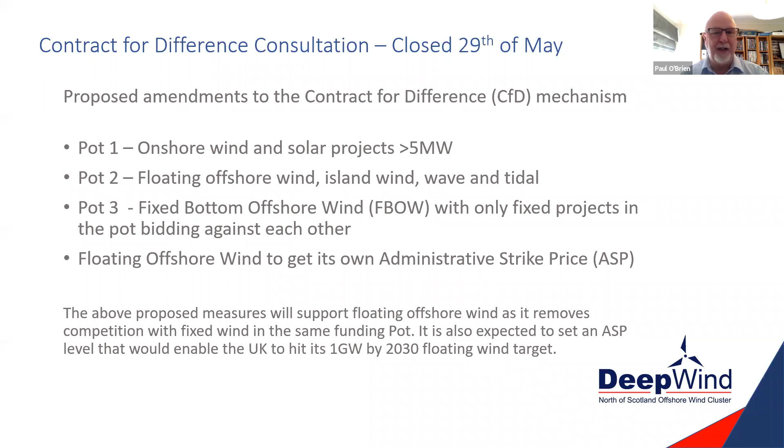We're hoping it will be enough to engender the first one gigawatt of floating wind in the UK by 2030. That's not the industry's target, that's the government's target. The industry is calling for double that, a two gigawatt target to be added. Because we're changing the contract for difference mechanism, floating offshore wind doesn't have to compete with fixed wind in this round. It's a bidding competition, so floating offshore wind will now just compete with each other. That's a great step forward for floating offshore wind in the UK.

What's coming next are our pre-commercial projects. We already have two announced: Pentland Offshore Wind, a 100 megawatt project in the far north of Scotland, likely to have 7 to 8 substructures with perhaps 14 megawatt turbines, kicking off in 2025.

And the Salamander Offshore Wind project from two of our Deep Wind Cluster members, Simply Blue and Subsea 7. I should note Copenhagen Infrastructure Partners, who are delivering Pentland, are also Deep Wind Cluster members. Deep Wind is the largest offshore wind cluster in Europe, and the lead floating wind cluster in the UK, possibly Europe as well. We have 214 members in our floating offshore wind subgroup.

Salamander is 200 megawatts and expected to kick off in 2026. We see these as stepping stone projects to achieve cost reduction by increasing the number of substructures. We're learning by doing, which will give us tremendous steps towards cost reduction by serializing the production of the substructures.

Now, the research happening at the moment: we have a number of programs running. You'll hear more from Ralph later, who's involved in the Floating Offshore Wind Centre of Excellence. One of their recent reports was a cost reduction pathway to subsidy-free, looking at the deployment needed to achieve cost parity with fixed wind.

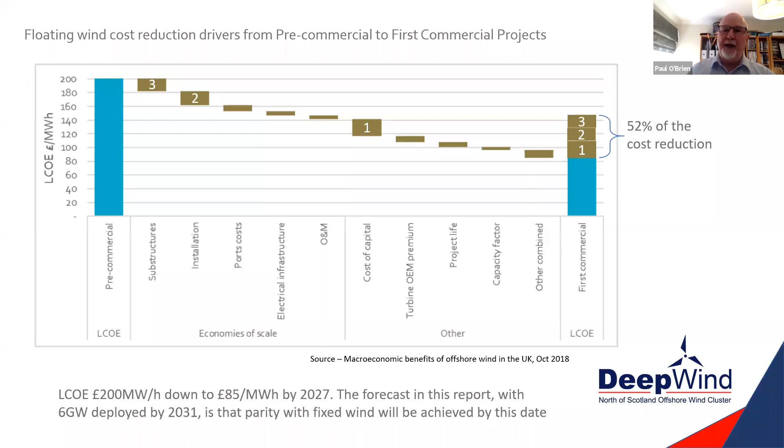There's also the question of whether the industry will disconnect and take them back to shore for those repairs, or come up with an innovative solution that overcomes the challenges. Using a jack-up in the water depths we're talking about is probably not an option, so we need to come up with a solution. The first 2 look at what those solutions could be if we stick with offshore, or if we're intending to disconnect the substructures and bring them back to shore.

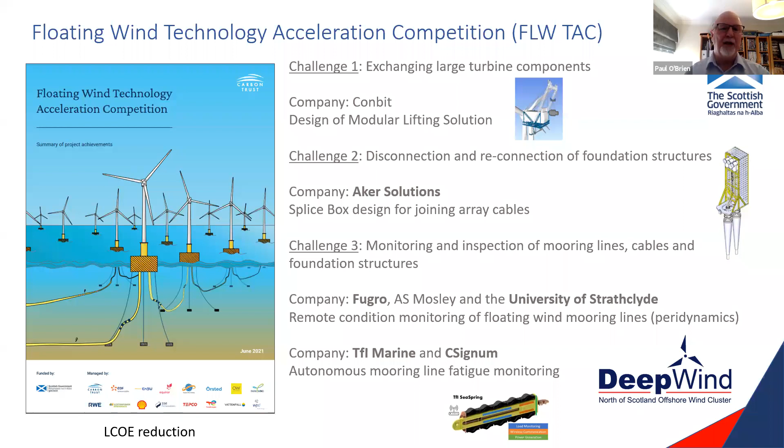So these are the kind of areas that we need to decide on when it comes to the operation and maintenance required for large activities such as removing blades, taking out the gearbox, etc. The industry has not decided which way to go, so we're looking at solutions that will deliver both.

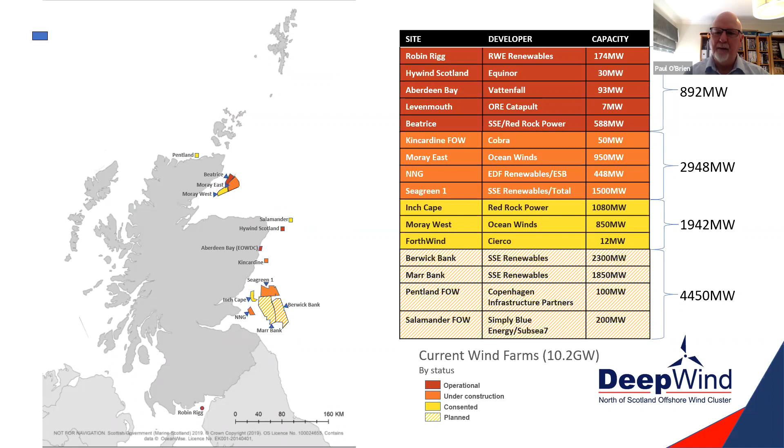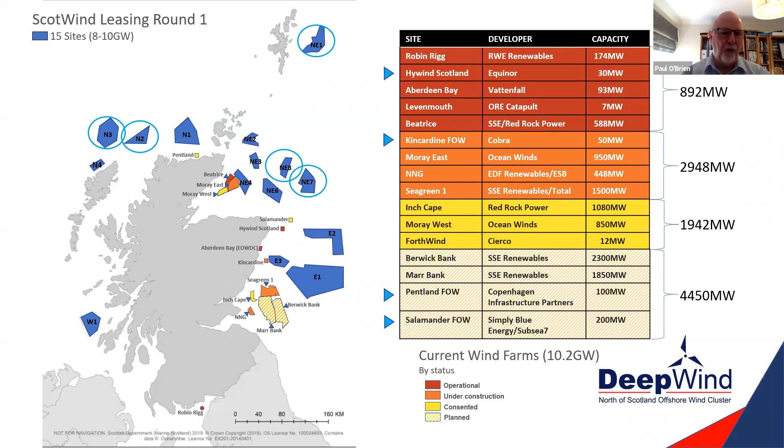Those circled are in deep water, so these are 100-meter plus sites, so they will definitely be floating. Some of the others are mixed sites, it could be fixed or floating, but we're expecting that of the 10 gigawatts that's expected to come out of this project, about half of it could be floating wind. So we could see up to 5 gigawatts of floating wind in this leasing round. Next slide, please.

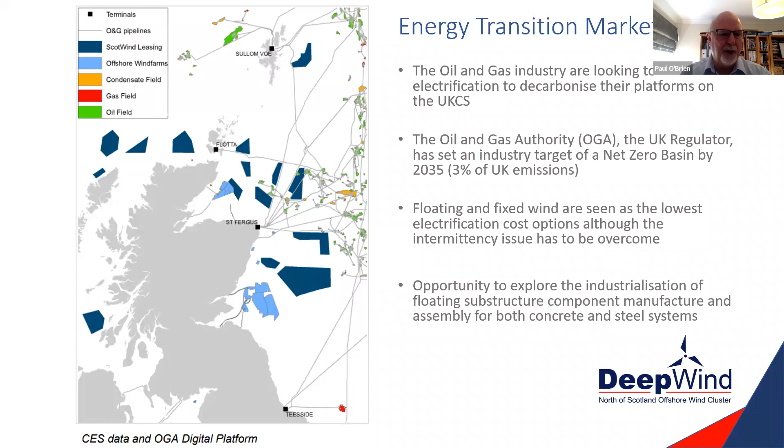Most importantly, we need to look at the industrialization of manufacturing the substructures and the assembly of them. So we need highly automated substructure final assembly facilities at portside for both steel and concrete systems. Many people are looking at concrete as a cost reduction opportunity, but the real key will be the design of the substructures. We need to design the substructures for manufacture, whether that's steel tubular components from tower manufacturers or slip forming of the concrete modular components. We believe this is the way forward for cost reduction on the substructures.

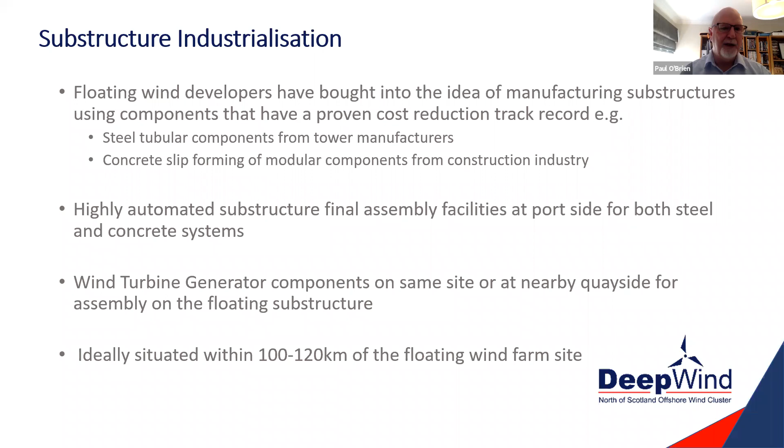We need to be very near to the sites, the floating wind sites. That has been proved, particularly at Kincardine. We cannot be trying to move these very large substructures, which are 80 to 100 meters in diameter. They cannot be coming from any further away than about somewhere in the 100 to 120 kilometer range from the actual floating wind site. Next slide, please.

And finally, we are looking at the learning. We need the learning to get the cost reduction. The report I referred to earlier looked at a 13% cost reduction through the learning itself. So we need these stepping stone projects. We need to see that there is an opportunity for mass production of the substructures to get the investment that the industry requires.

And so the pre-commercial and the energy transition projects in Scotland will be very important to achieving how we're going to actually deliver these substructures in a very cost down manufacturing opportunity way. And I think that's the last slide. Just check, move on to the next one.

Yes, so hopefully that's of interest. I ran through that pretty quick because we don't have a lot of time, but hopefully you can see that we know where we need to achieve the cost reduction, and we are moving in the direction that we believe will give us that cost reduction, which will see floating wind become a major competitor to fixed, or rather not a competitor, because a lot of countries only have deep water, so fixed is not an option. They just need floating offshore wind to become cost competitive with other forms of energy.

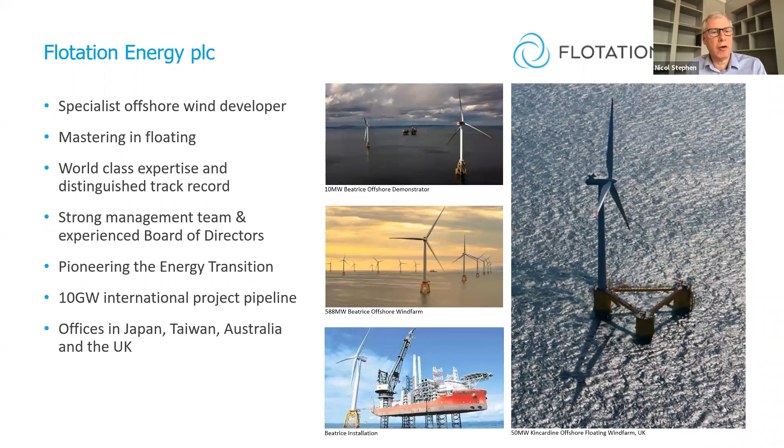We also conceived, designed and developed the Kincardine project, and we've been working with our partners, Cobra, the Spanish company, in relation to not only Kincardine, but also a number of other projects in the United Kingdom and Ireland. We've got an international pipeline now of around 10 gigawatts of projects, and we have offices in the UK as well as in Japan, Taiwan and Australia.

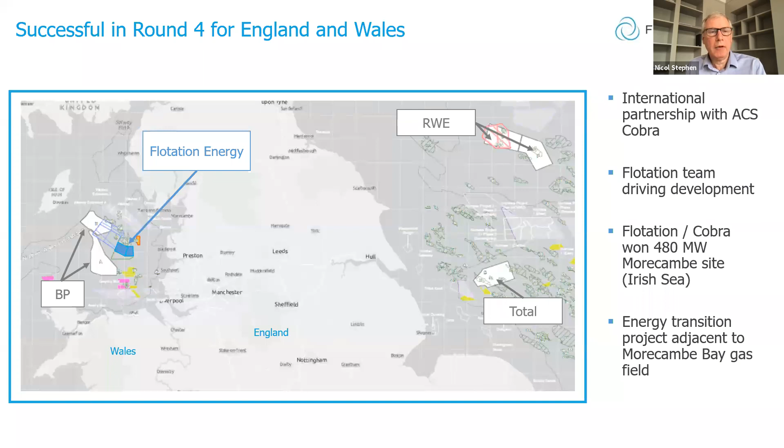The wind farm, depending on its size and scale, could serve either one major platform or a number of platforms, perhaps in the central North Sea or the northern North Sea. A large area of the North Sea could be served from one platform. We've got a project we're working on with a major oil and gas company right now that we're hoping to get operational in the mid-2020s, and it would be a 300 megawatt project.

We're also working both internationally and in England and Wales on other projects where we're going to be partnering with oil and gas majors. The advantage is that it decarbonizes the offshore operations. All of the offshore electricity is generated from gas or diesel on our offshore platforms in the United Kingdom, and it's become a priority of the government to decarbonize those operations using renewable electricity.

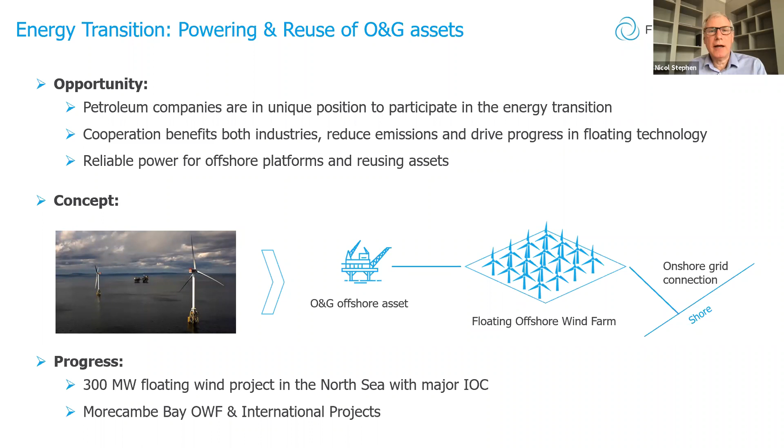All of this gives us a great platform, a great launch pad to do things in other parts of the world. And having developed Kincardine, having seen it become a success and become the largest project in the world, we decided to move on from there.

And we are actively seeking partnerships with local developers, with local companies that are interested in the development of both fixed and floating, but clearly our expertise is in floating. We've got projects as well - I don't know if anybody today is listening or looking in from Australia, but we've now also got projects and offices in Melbourne and Perth, including energy transition projects where we're working with one very significant oil major.

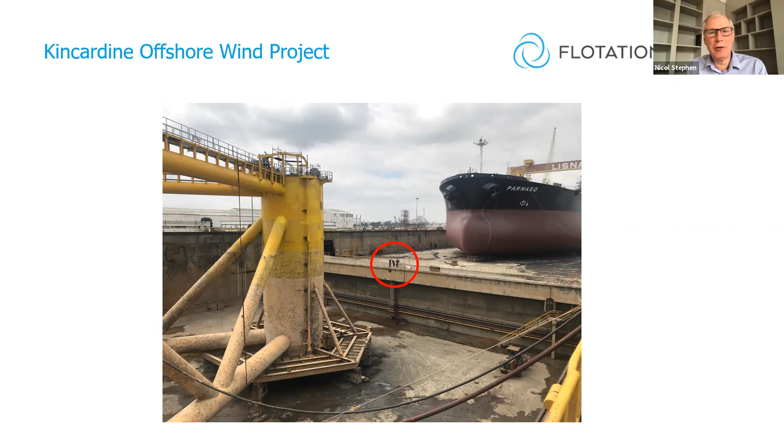And as Paul was saying in the previous presentation, we need to look at modularization, industrialization of the process, and being able to do it close to site. These are major lessons for the future, and we are determined to be an important part of that. To achieve that, we will need to look at improving some of the facilities in Scotland, but I know that both companies and government are committed to that, because this industry is so important to the future of our country, and I believe very important to the decarbonisation, to the net zero targets for the rest of the world.

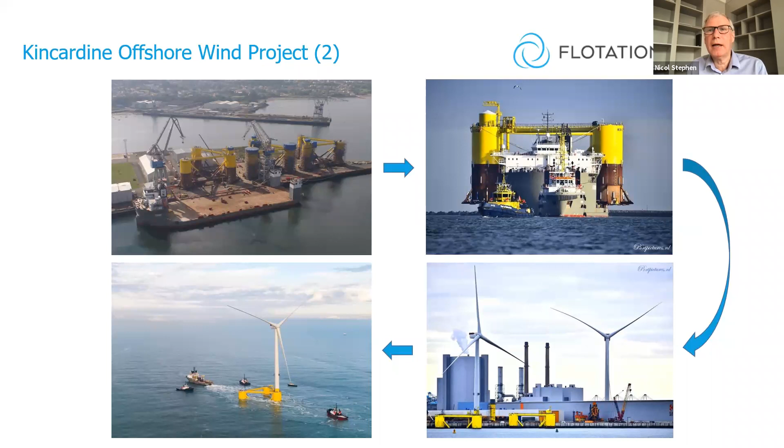So in summary, just a bit more about Flotation Energy. We believe we have a unique team, real expertise, and a very strong track record. We've got this pipeline of projects internationally. We've been awarded the Crown Estate lease with our partners Cobra in England and Wales. We're pioneering the energy transition, developing projects in Taiwan, Japan, Europe and Australia. We strongly believe that development has the potential to be a domestic business.

There are some very major multinational players in this business, and they're highly respected. But I would like to see more local companies getting involved in development, and Asia is expected to be the major growth market for offshore wind through to 2050, with over 600 gigawatts of new projects to be developed. That's why we very much welcome opportunities for collaboration and partnerships.

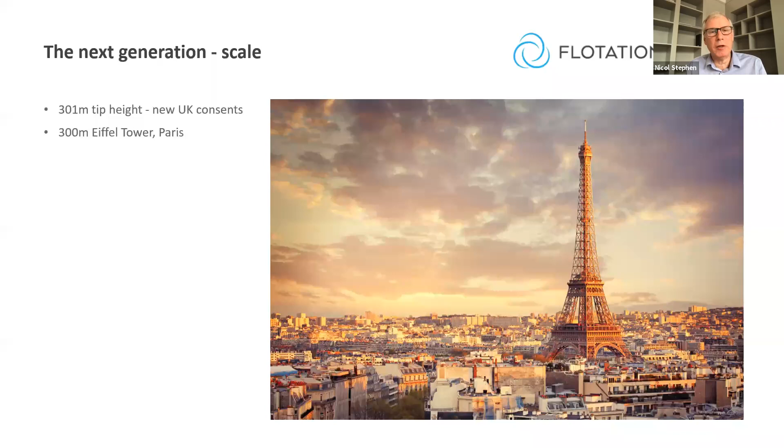Just a sense of scale - the next generation, where is all this leading? I mentioned the tip height of the existing turbines at Kincardine, 194 meters. The Eiffel Tower in Paris is 300 meters, and it's expected that in the next 10 years, that's where these wind turbines could go, a similar sort of height. So if we skip on to the next slide, you can see it there.

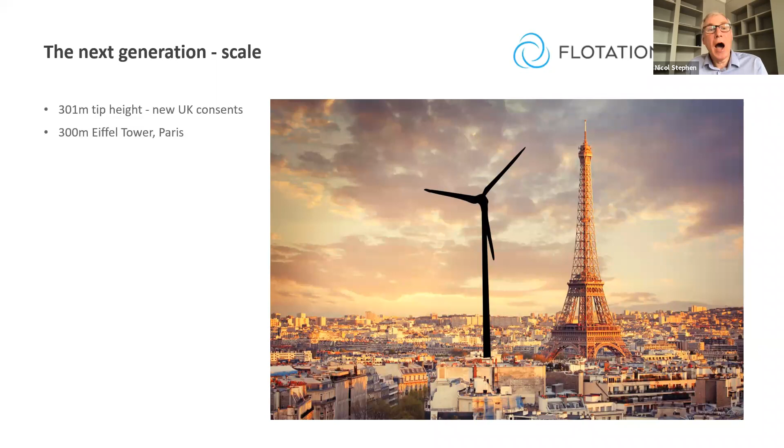Sorry, one back. You can see there the sort of scale of turbine that you would expect to see within 5 or 10 years as we move up to a 20 megawatt turbine. And we can float these - that's the message. We already have the skills, the technology, the knowledge, the know-how to be able to do that. So how do we achieve that? That's what I'll turn to at the end of my presentation.

Well, first thing is clear: we need to get ready for bigger and bigger turbines and projects. I've visited some countries just before the lockdown where they're still very much about early stage testing, experimental projects, maybe 1 or at most 2 or 3 turbines. We're beyond that stage now. We can go to the full-scale commercial stage.

Second point, as Paul was mentioning earlier, different foundation types are probable. That means they could be semi-sub, which will probably be the most significant, but they could be spar or tension leg, steel or concrete. It's unlikely we'll standardize on one single solution as we have with the turbines, which are one steel structure, three blades, pretty much industry standard. With foundations, there's definitely room for different designs, and there are at least 8 or 10 credible designs out there at the moment, which is good for competition and also good for cost reduction.

My third message is find the very best wind and scale up. With high wind and with Kincardine, we're seeing capacity factors for floating wind pushing up over 50, over 55%. Costs are starting to fall very significantly. There's a real opportunity to push forward and get these floating sites in the strongest wind speed areas, where there's less visual and environmental impact. Floating sites are better for seabirds and better for sea mammals, the dolphins and the whales.

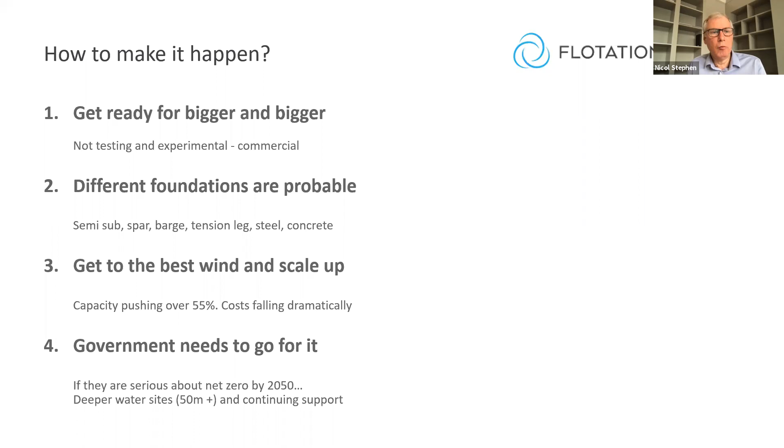My final point is that governments need to go for it right around the world. If they're serious about net zero by 2050, they need to support floating in this transition period to get to the full-scale projects that will make it one of the cheapest and most cost-effective ways to deliver renewable electricity worldwide. And then just a few quotes on my final slide.

Is there a floating wind future? There are some cynics. I'm here in Aberdeen, Scotland, the heart of the oil and gas business, not only in Scotland but arguably for Europe. Many of my friends were quite cynical when I went into this industry more than 10 years ago. Some of them even smiled or perhaps even laughed. They thought there was a very, very long future for oil and gas and a very small future for renewable energy. Well, all I can say is they're not laughing anymore. They can see the future happening.

Remember that Tom Watson, when he was chief executive of IBM, said he thought there was a world market for maybe 5 big supercomputers. Remember that in 1993, Bill Gates said of the internet, we're not interested in it. And remember what Gary Hamel said in his book, Competing for the Future: it's not about predicting the future, it's not about monitoring the future, it's about getting out there, making the future happen, shaping the future, making the future a reality. That's what I believe together we can achieve, a very exciting future for offshore wind, both fixed and particularly for floating.

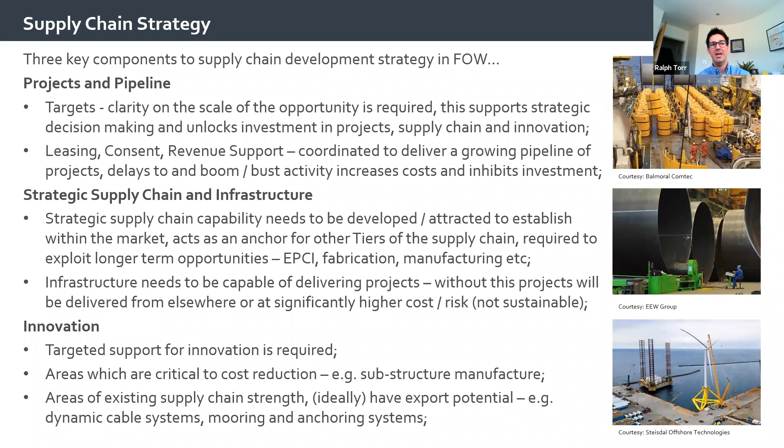The main focus for markets, particularly here in the UK, is clearly substructure manufacturing and project delivery, but also in the UK and Scotland particularly, we're looking at where the existing supply chain strength sits, and we'll hear from leading organisations shortly about that. Our particular focus at this stage is on dynamic cabling systems, mooring and anchoring systems, which are critical components, and areas where UK and Scottish organisations already have world-leading knowledge. So those are the three main elements to a broader supply chain strategy that any market would take, and I'll touch on a couple of specific activities we're doing in the UK Centre of Excellence to support the growth of the industry.

So there are three main themes to our strategic approach to developing the supply chain in the UK. The first is working with our partners to make sure that the UK establishes itself and grows to become the leading floating offshore wind market in the world.

We're already in a great situation, but there are a lot of other markets moving very quickly, so we want to make sure the UK retains that leading position. There's quite a lot of work ongoing to make sure we're very clear about the role floating offshore wind will play in net zero in terms of scale of deployment. That's a key part of our activity.

The second area of activity for us is creating opportunities for the UK supply chain, making sure that the projects that develop over the next 5 or 10 years develop in a way that means the UK supply chain has a really good opportunity to supply products and services into them.

The final part of our activity is looking at how we can attract world-leading innovation and deliver it from within the UK, working with our partners to help play a key role in addressing critical issues around, for example, dynamic cabling systems and mooring and anchoring systems. So yeah, thanks for your time today.

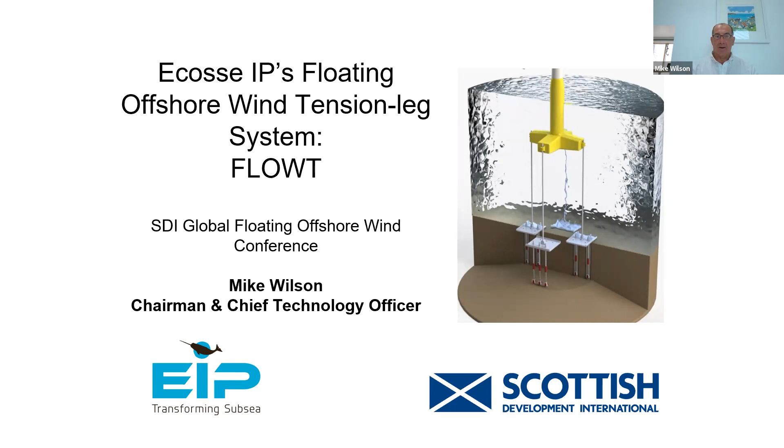This is a semi-technical presentation which shows in this first slide how a tension leg platform is developed for supporting floating wind substructure and how it's attached to the seabed. It's very often forgotten about because it's out of sight and out of mind, but one of the key drivers for floating wind is how do you make the floating wind substructure stay in the right position, and how is it anchored to the seabed.

It can be a very expensive process. For a 10 megawatt turbine to have a tension leg platform, as we've shown here, you need an on-bottom equivalent weight of about 5,000 tons. So installing 5,000 tons subsea is a very difficult and expensive task, so we need to find a different way to achieve this. Our FLOWT system is one such system that enables this to happen.

By having a tension leg system, you have suitability for all water depths and a huge range of seabed types. We can use this to moor floating wind alongside existing oil and gas platforms or as part of an offshore wind farm.

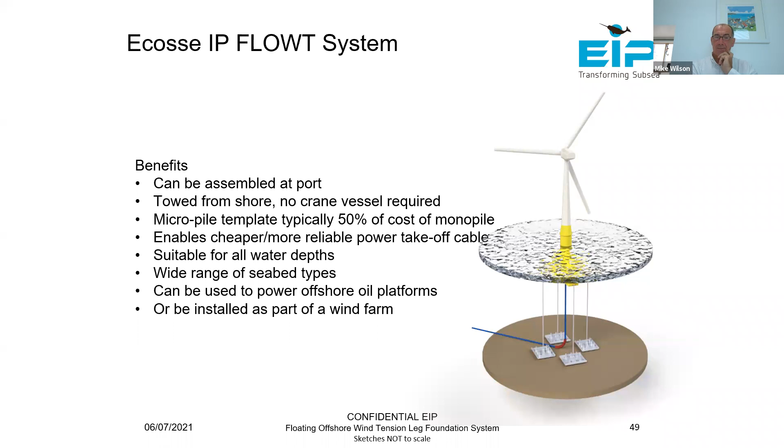The components of our system are an ambient lifter, which is our own proprietary technology, a micropiled template, which is owned by others, the floating transition piece, and the tension leg foundation.

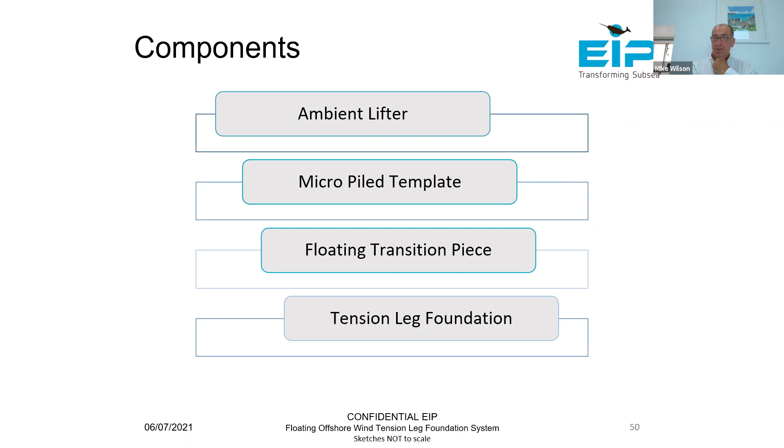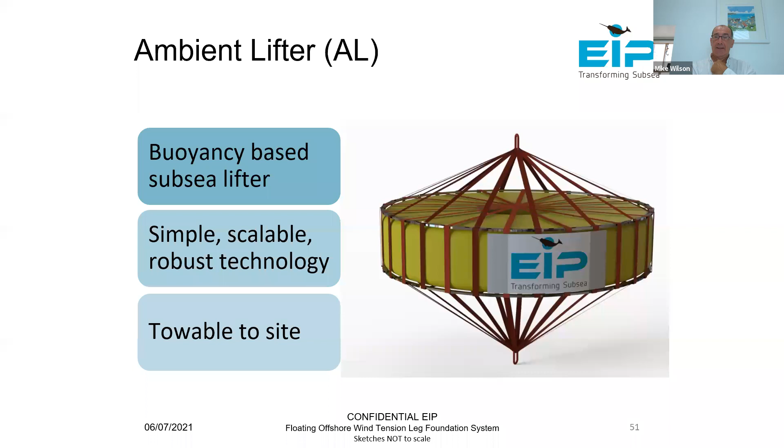What is ambient lifter? It's a buoyancy-based subsea lifting system that can lift anything, not just floating wind structures. It's a simple, scalable, robust technology that makes large structures towable and installable on site using our system.

Some of the benefits of ambient lifter versus conventional technology are simple components and simple technology, enabling low-cost local deployment, local being a key part of this. It's a robust solution that can install large structures at any depth, and we can use this to install any size and type of foundation. This enables much wider weather windows than if you use surface-borne technology to install.

By comparison, heavy lift vessels are expensive, location dependent, and there's scarce availability. They're very weather dependent, and their mobilisation and demobilisation costs are very high.

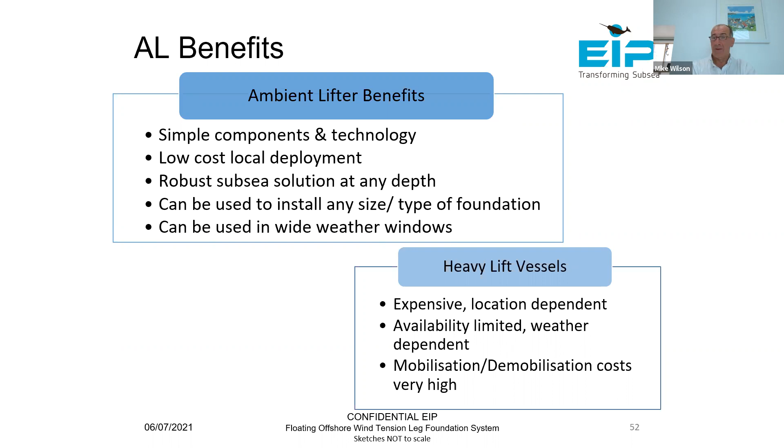So what are micropiles? Micropiles were developed in the 1950s and 1960s to stabilize onshore structures and are currently used for onshore wind turbines. They mimic a tree structure, where the root nature of the tree enables it to withstand wind force during normal weather conditions. It involves using a drill rig to grout in pins which form a lattice work like a tree root structure, and we are helping others pioneer this for the subsea market.

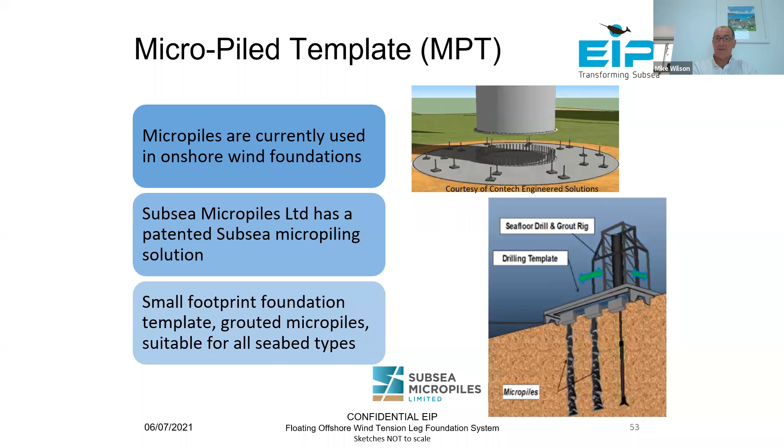The benefits are that it's suitable for rock seabed and other seabed types - rock, sand, clays. It's significantly cheaper than other foundation types, and again can be installed without surface-borne vessels being directly tethered.

So, the floating transition piece - we all know the benefits of being able to float these to site. In combination with tension legs, it minimizes movement and enables a low-cost power export cable to be used. Power export cables are a critical single-point failure for floating transition pieces or floating wind turbines. Basically this can provide a firm base for any standard type wind turbine.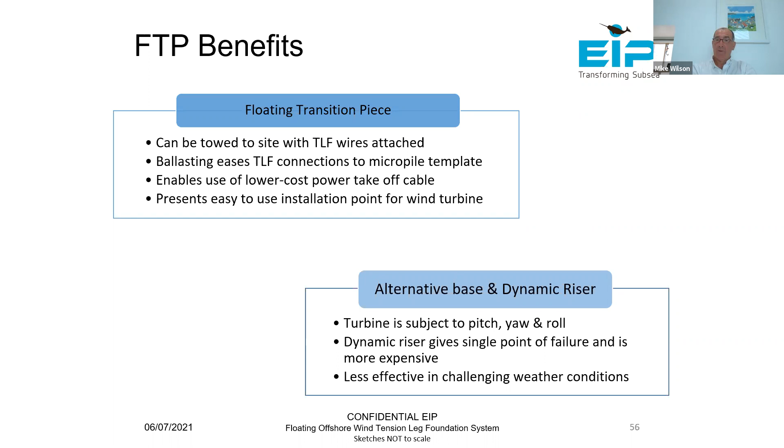The tension leg foundation is tried and tested for many decades in the oil and gas sector. It uses vertical anchor wires or pennants, and has a very small footprint. This small footprint is actually critical for other seabed users. Instead of having a massive array over a couple of kilometers of anchor wires, which prohibits fishing and other activities, the vertical array means you take due consideration for other stakeholders in the area.

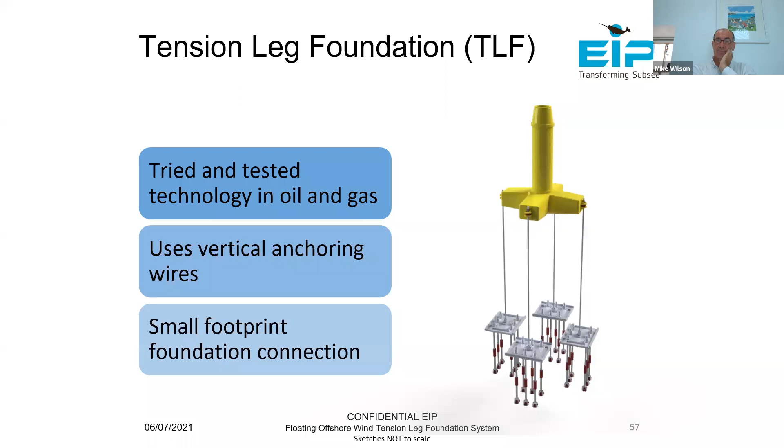The main benefits of the tension leg are that it remains vertical with smaller movements in bad weather, and it enables a lower cost export riser. Existing systems mean a large footprint, dynamic riser, and much more pitch, yaw and roll that needs to be taken care of by the turbine manufacturers.

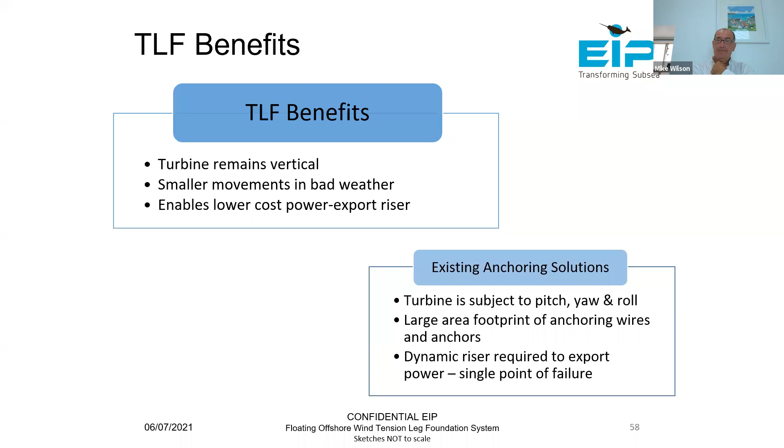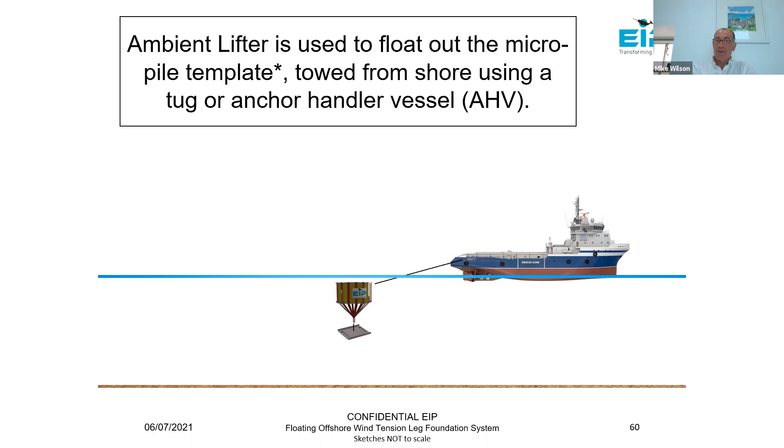A little storyboard here. The micropile template can be towed to site with a small vessel and positioned accurately on the seabed using the ambient lifter system.

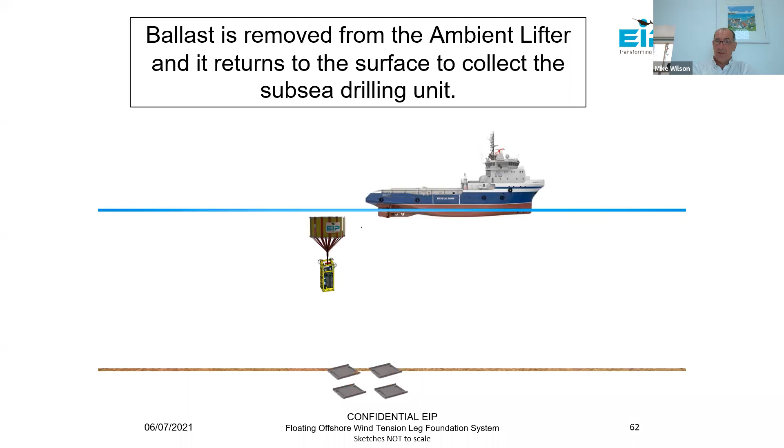Now we have the templates on the seabed. We use a subsea drilling unit to install the micropiles through the templates into the seabed.

You can see here the ambient lifter being used to control the drill unit, which is then subsequently put on the seabed. During all this activity, there are only soft tethers to the surface, so there is no significant weather penalty.

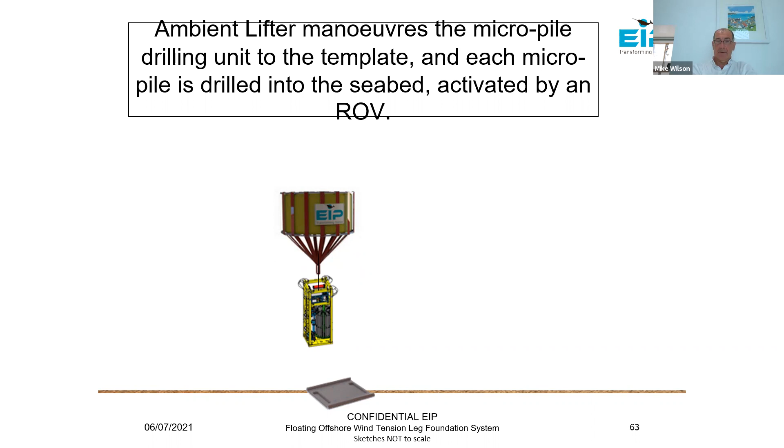Then we inject the grout into the micropile system and make the piles into the very strong structures that they are.

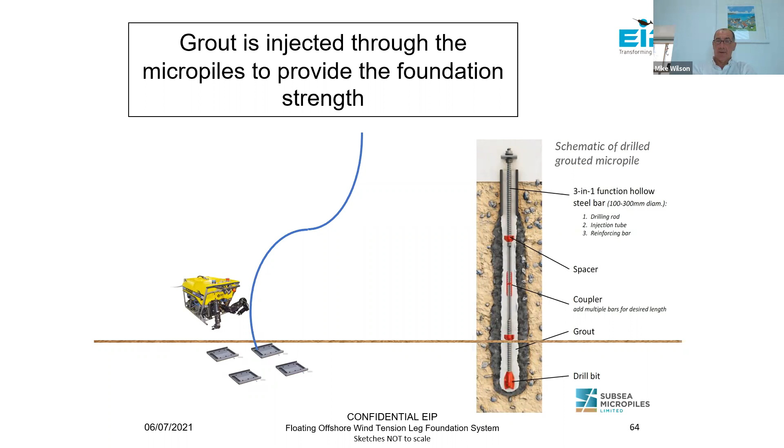Then the floating transition piece is towed to site, as conventionally demonstrated with other technologies.

Then the floating transition piece is ballasted down and the tendons or wires are maneuvered into place, again using ambient technology to help lift and maneuver these.

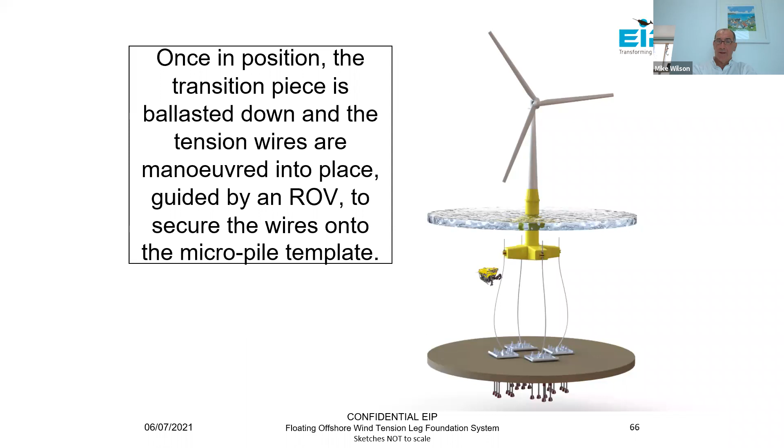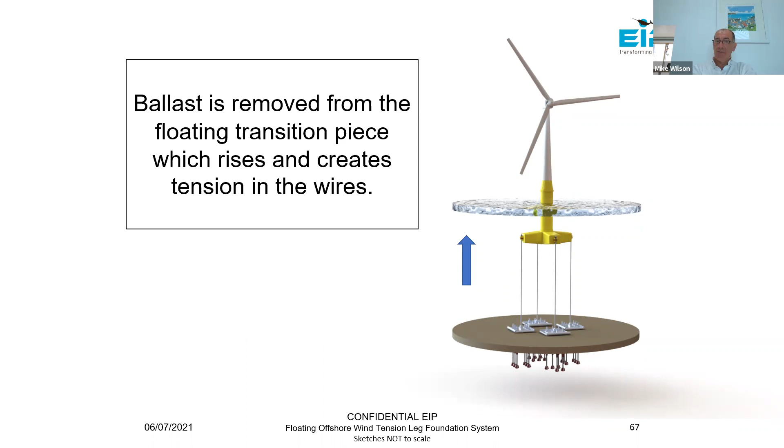Then the ballast is removed and the floating transition piece rises, creating the required tension in the wires.

Then the power takeoff cable is installed. We have a proprietary technology for making sure that the movement remaining in the tension leg system is taken care of inside the nacelle.

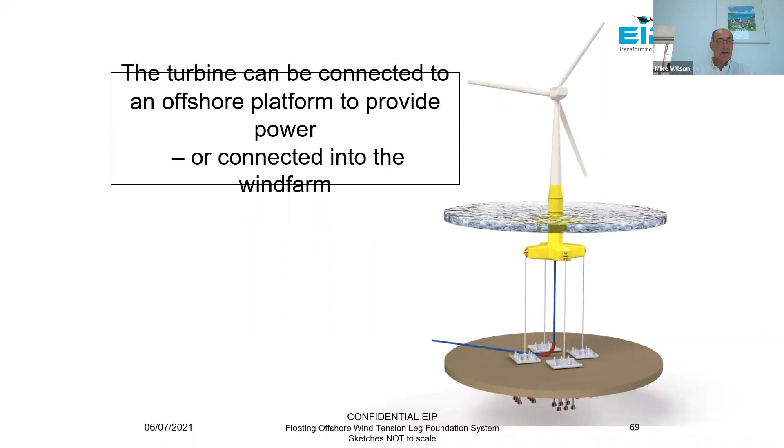And then we can connect these to others. That's my time up.

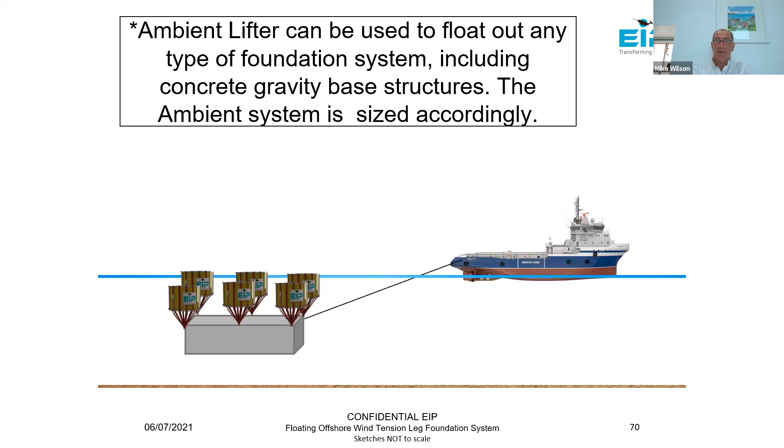Again, the ambient lifter can be used to install many different types of foundation - graphically here, a ballast made of concrete. Concrete is a very interesting material because there are new green types of concrete coming to the market. More of that later.

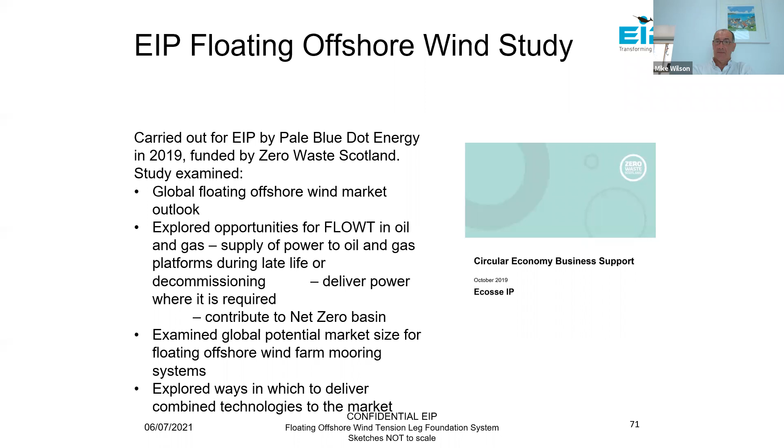We've done significant work on this with supply chain colleagues, and we're currently working with the Nippon Foundation project, which looks at using the ambient lifter alongside some other colleagues' technologies for installing the turbines.

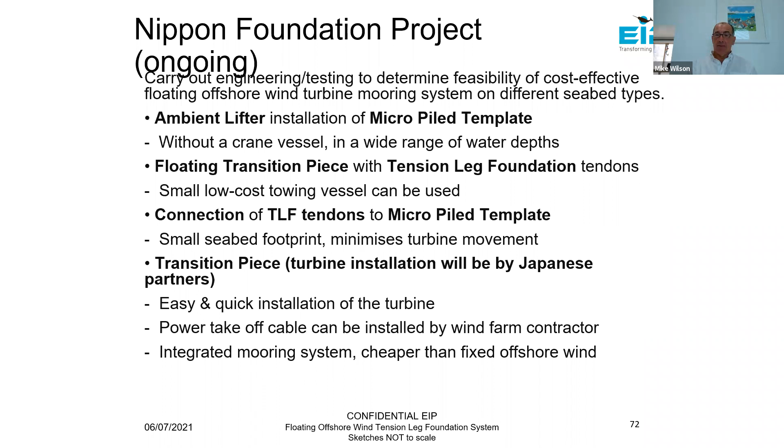That will do for me. Thank you very much. Thank you so much, Mike, and I love the fact that you timed yourself and set an alarm clock. Thank you.

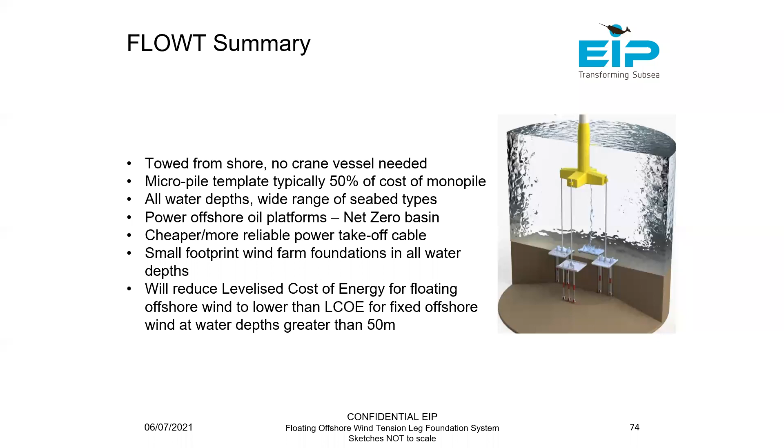Good morning, good afternoon, and good evening, everybody. My name is Jason Guthrie, and I'm a naval architect with First Marine Solutions. I'll be presenting FMS's capabilities today instead of my colleague Tom McCombs, who is away on other duties. I myself have a rather mixed engineering background, but my main focus has been in maritime operations with specific interest in diving and subsea systems in general. Prior to my time in academia, I worked in Australia and New Zealand, where I got the chance to work with smaller scale mooring systems whilst working in the commercial diving sector.

So enough about me, and let's talk about First Marine Solutions. First and foremost, FMS is a mooring system provider. It is what we've always done and remains a core aspect of our business. Within the world of mooring systems, you can pretty much name it, and I'm sure we've either owned it, installed it, retrieved it, or supported its development through our consultancy.

Historically, we have been 100% oil and gas focused, but as we're a strongly forward-thinking company, we have started to make major investment into our renewables department, which was set up last year. Although we're a Scottish company through and through, with our headquarters in Aberdeen, our renewables office in Glasgow, and our expansive ports facility in Montrose.

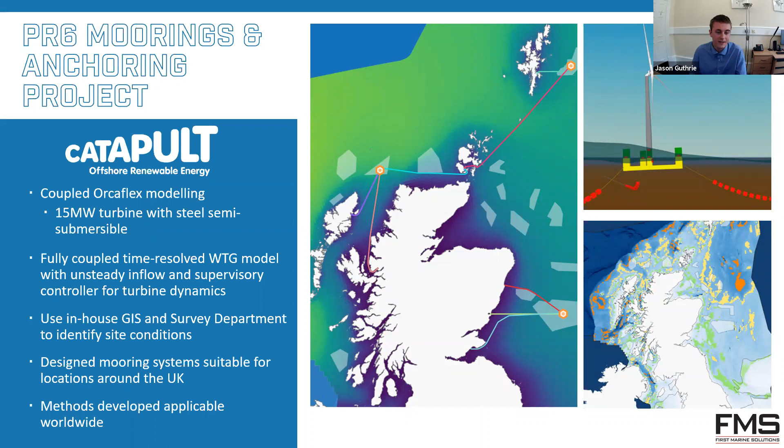So with that fast and high-level overview of FMS activities, I'd like to mention what we can offer you during your company's development in floating wind. In addition to the points I mentioned earlier, FMS is highly involved in the industry's movement towards better integrated risk management strategies.

In fact, last month we submitted a proposal to the UK government to test our in-house and in-development condition-based monitoring software at full scale. We appreciate that as floating wind increases in magnitude, both in terms of turbine capacity and in sheer numbers of installed platforms, the remote monitoring of the mooring system will be a key factor in driving down costs of the energy system.

We appreciate that floating wind will require new techniques and hardware to overcome the industry's unique challenges. With this in mind, we are always researching the latest equipment to see how it can drive down cost and risk for our clients. We have worked with most suppliers in the industry and maintain our technology-agnostic position. Simply put, we know what works where and what doesn't. This grants us the ability to develop solutions specific to your needs and requirements.

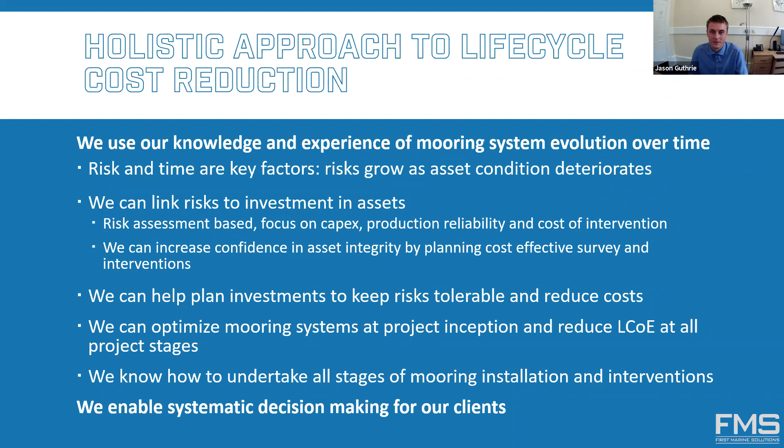And that's the end of this rather quick overview of who First Marine Solutions are and what we do. Thank you very much for your time. If you have any queries, please drop me a line on my email and I'll get back to you straight away. Back to you, Kevin.

Okay, thank you so much, Jason. It's a really good example of how we have transferred so many skills and our knowledge from the oil and gas industry into floating offshore wind.

We'll now move on to 2 presentations on dynamic cabling, starting with cable installation, and we'll hear from Rob Lindsay from Global Offshore.

Hi everyone, thanks for the introduction there, Kevin. Also thanks to SDI for this opportunity to discuss some of the aspects of cable installation that we within Global Offshore are involved in.

So for those who are unaware, Global Offshore is part of the wider Global Marine Group, which also includes Global Marine Systems, who provide fibre optic cable solutions to the telecoms industry. We've also got our sister company CWind, who provide power cable and asset management services, as well as crew transfers and inspection, maintenance, repair services to the renewables industry.

And we also have Ocean IQ, who provide an array of services to maximize cable lifespan, including route engineering, cable surveys, permitting, records management, and charting. This slide here just provides a high-level overview of some of the services that Global Offshore provides to its renewable customers, right through from cable management, cable storage, to route planning, engineering, installation, and burial.

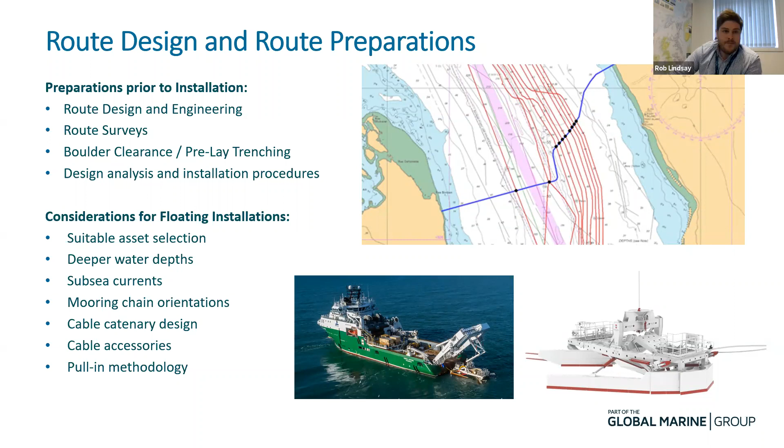For Kincardine, prior to the installation, we also performed a pre-lay grapnel run just to clear any missed debris, which might include old fishing gear or ropes, out of service products.

Thereafter, we did a final pre-lay survey of the route just to ensure that the route was free of any hazards. We also deployed a number of rock bags at the HDD, horizontal directional drilling, duct just to support the cable catenary at the exit point there.

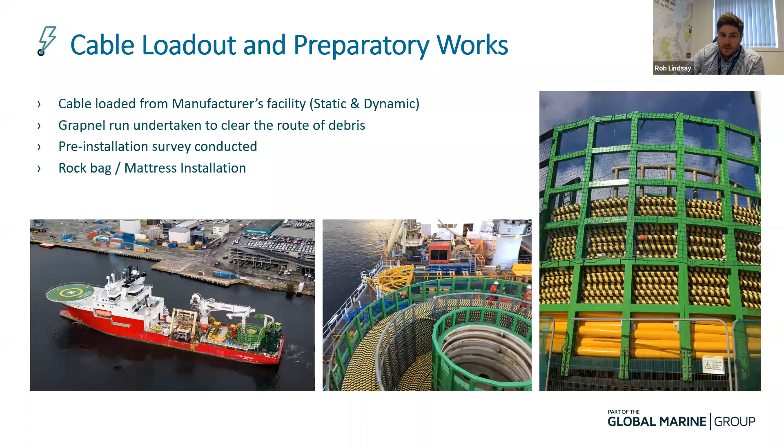Although each requirement may have some differences in scope, it's likely that a floating wind farm installation will consist of a shoreside pull-in for the export cable, offshore installation of both export and inter-array cables, as well as cable pull-ins to the floating structure.

For the Kincardine project, the first end of the export cable was pulled into the beach through a 500-meter HDD duct with the winch, which was set up adjacent to the transition bay where the cable was eventually terminated.

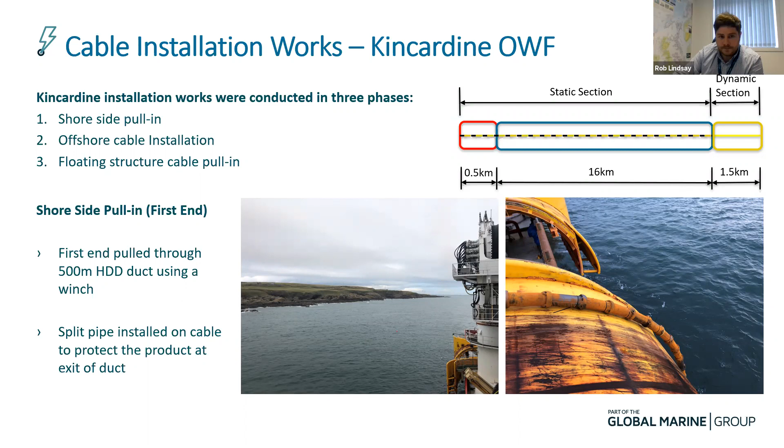Upon completion of the first end pulling operations, the vessel then performed lay along the engineered route to the wind farm site. Lay speed is typically controlled using the deck tensioner on board in conjunction with the vessel speed and the touchdown point of the cable relative to the overboarding chute.

It's continually monitored in real time using the ROV, and the typical lay speed that you could expect would be sort of 6 to 7 meters per minute.

For Kincardine then, crane operations were utilized during the second end pull-in, ultimately to support the buoyancy modules and allow them to form the correct shape in the water column during the lay.

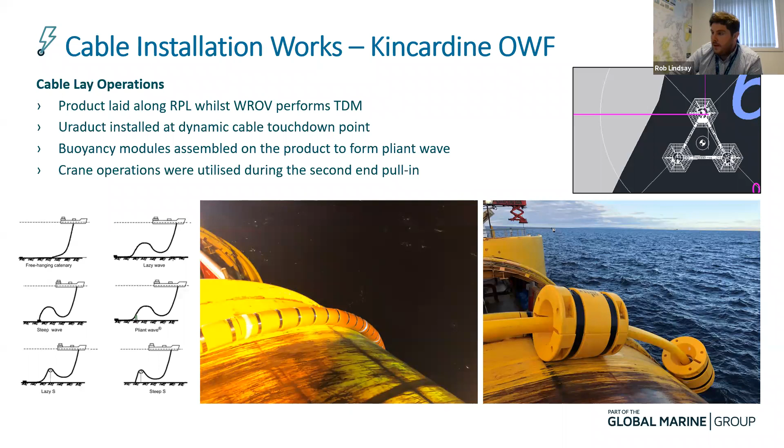So bend stiffener was installed on the end of the cable and pulled into the underside of the floating structure. The bend stiffener essentially comes in two components: there's the pulling head and the main body.

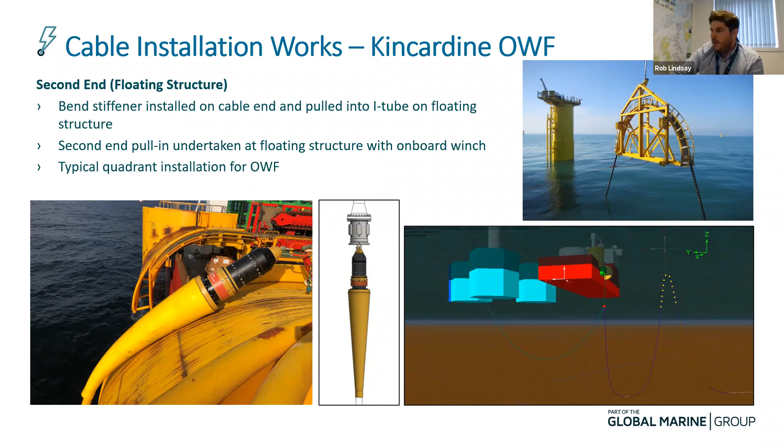So once the pulling operations were complete, and the termination works and final cable testing were undertaken and completed on the top side of the platform, we subsequently performed post-lay trenching of the export cable using our Q1400 trenching system in a hybrid configuration, which is essentially a combination of both chain cutting and jetting nozzles.

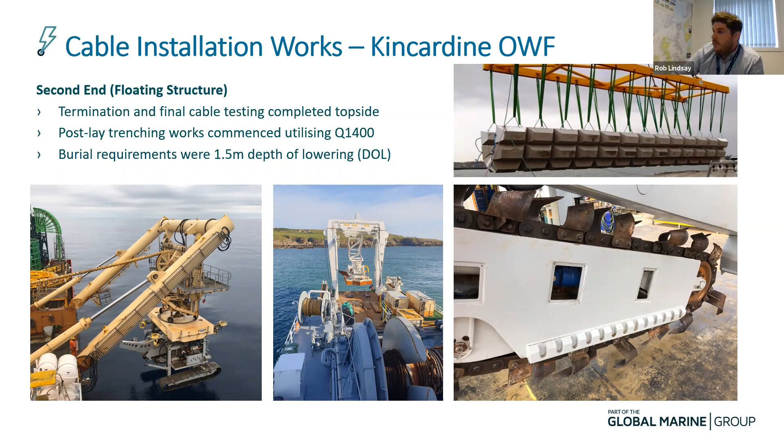I think it emphasizes that there's not always one definitive solution for cable burial or protection. There's a wealth of other tools and techniques out there, such as controlled flow excavation, vertical injectors, cable plows, as well as fitting cable protection systems or rock placement and installation of concrete mattresses, per the top right image there. Next slide, please.

So although this was relevant to the demonstrator project, the principles are the same for the ongoing Kincardine development, which included the second export cable as well as the five inter-array cables. Next slide.

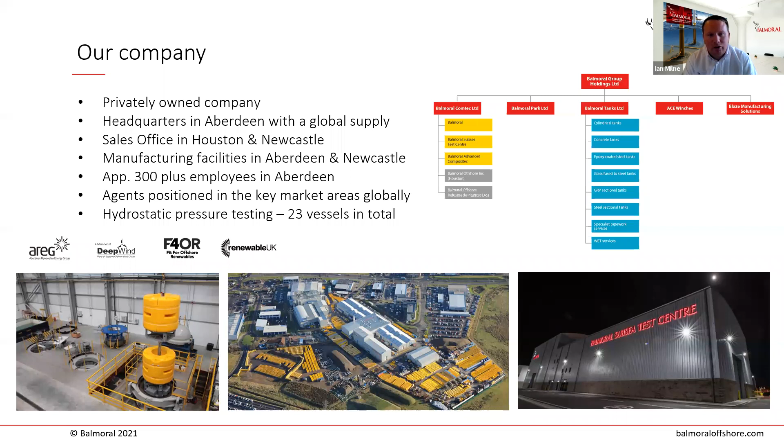Balmoral has got a raft of technologies and product solutions. We've been established for over 40 years, so we've got a lot of experience there in terms of tried and tested technologies, particularly in deep water, harsh environments, which is where we're certainly leaders.

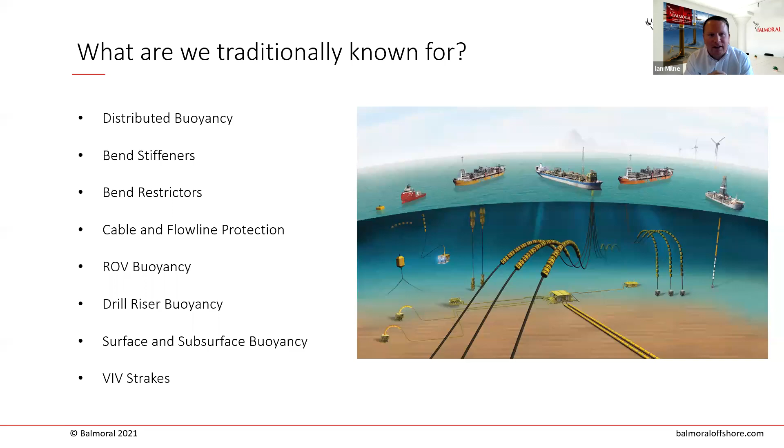And then if you look at the mooring, the guys earlier were speaking there, the surface and subsurface mooring, that's products that we manufacture, and that comes out of Balmoral. But that knowledge of dynamic natures is very, very well supported within fixed wind as well.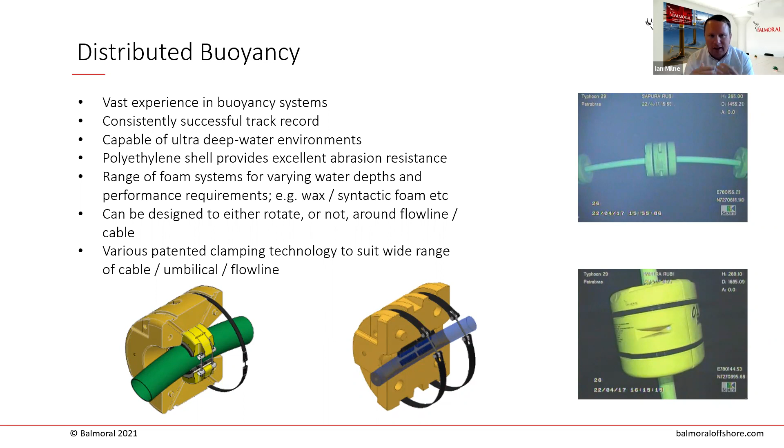Balmoral appreciates and understands that we're signing up to a 25, 30, 35 year lifespan, and part of our offering and validation is that we do a lot of upfront engineering before anything gets manufactured. The products are very standard, but when putting them into different environments, we need to make sure they won't be affected by 1 in 100 year storms, seismic activity, hydrodynamics, VIV impact, etc. So that's all taken into account and taken care of at Balmoral.

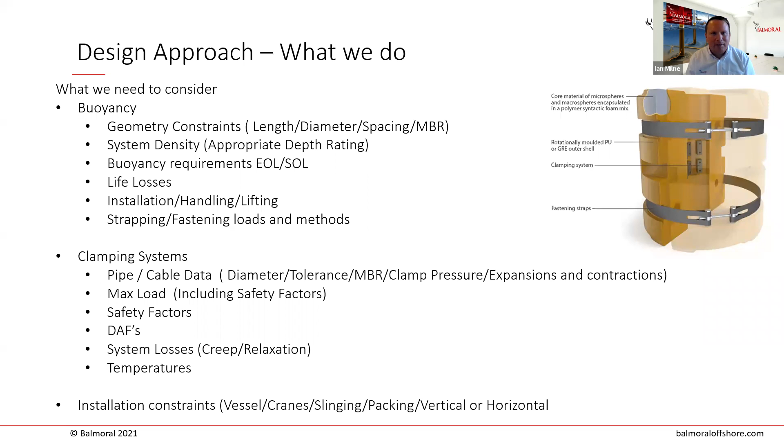How do we get costs down? I think anyone within the supply chain will sing the same message, there's only so much you can do with cost. Every item has a cost, but how can we think smarter, not harder? For Balmoral, it's very much at the core of everything we do, our value engineering, that's the way you can reduce cost.

One of the biggest things for us is early and meaningful dialogue, and the availability of accurate information, particularly around the subsea environment, the cabling, clamping loads, expansion values. All of these pieces of the puzzle are so important to ensure you can actually value engineer the best solution for the job. Quite often we'll be asked, Ian at Balmoral, I want you to give me 500 modules of X size and X uplift, can you quote me please? Which is fine, but we really get involved in the nitty gritty, if you like.

And we ask, right, well what's the uplift requirement? What's the vessel constraints? Can we make, for example, the modules larger? I can give you the same uplift, but I'll make the modules larger, which means, A, there's less to manufacture, so that has a commercial benefit, and B, there's less to install.

So right there, I might be able to save days, weeks of a vessel installing at several hundred thousand per day. So that value engineering to aid and get this cost down is really important. And the key message for us is dialogue.

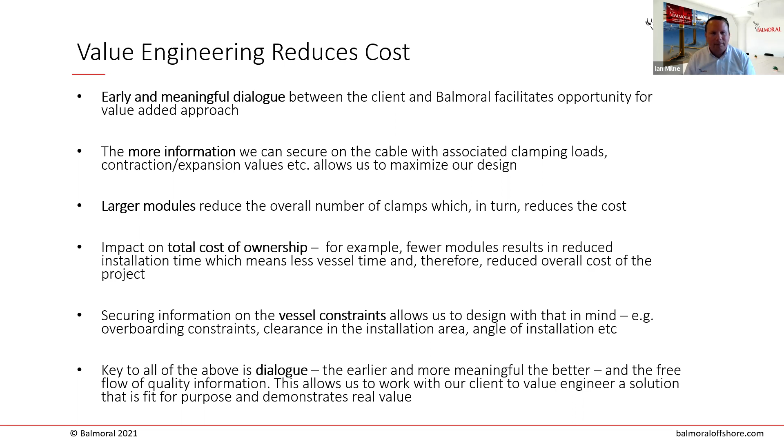And very conveniently, a case study. I'm under quite a strict non-disclosure, so I can't disclose the project name, but we are currently working on an offshore floating wind farm at the moment. They did a pilot project for a handful of turbines where Balmoral, we weren't successful with the buoyancy or the bend stiffeners. But when they were coming to the larger scale project, the dialogue started to increase, and we were invited to meet with the developer on several occasions.

So they said, give us some feedback, tell us what you're trying to do, and as per always, you need to get the cost down. Buoyancy is too expensive. And we said, well, let's put the value engineering hat on. Let's see what we can do here.

And one of the points that was put across to us was the physical installation of each module, to get it overboarded into the vessel, into the water from the vessel. They were saying that they'd experienced anything from 25 to 30 minutes per buoyancy module. Now, on a couple of turbines, with a handful of modules, that's not that big a deal. But when you're looking at the larger scale installations moving forward, how can we get that time down?

So instantly we said, well, we have a particular clamping solution, which we call the Balmoral Integral Clamp. It's a patented solution, and what that actually does is reduce that installation time. By the way, it's installed and clamped together. And we managed to reduce that from what they had experienced at 25 minutes down to 6. So on a large installation, straight away, I've managed to save hours and hours, days and weeks of a vessel.

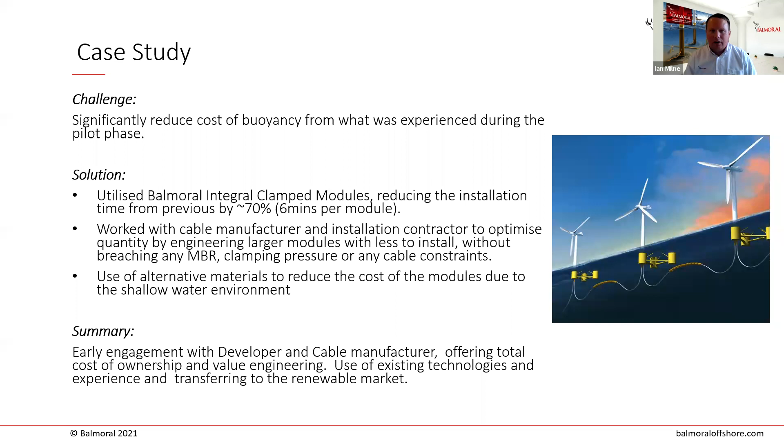So all that kind of cost saving, all that from the initial problem - you're too expensive, buoyancy is too expensive as a whole - we said, right, let's see how we can get that down for you. So that early engagement piece, that early dialogue, can really help. And subsequently, we're also involved very heavily with that project with the whole back tether systems as well, so there's efficiencies in terms of production, project management, etc. Next slide, please.

We're actually offshore just now on a project, getting live feeds and live images back to us, and seeing some very good performances of that installability, as I mentioned.

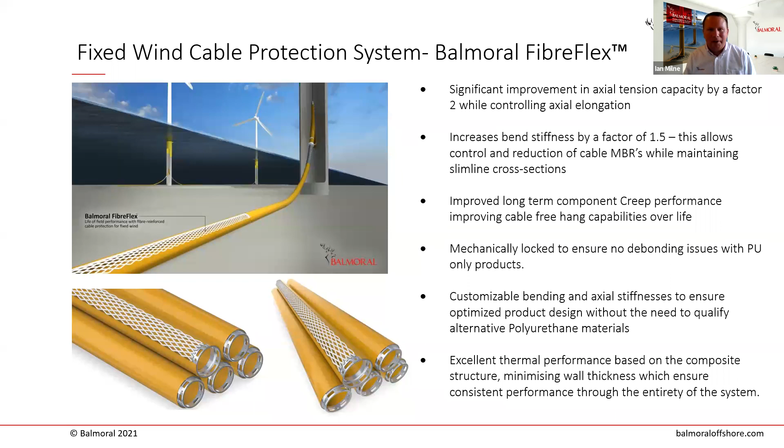Next slide please. I touched on it, the engineering piece is so important, it's so key. We can supply you products at a certain quantity and value, but if you want to look at what can be done more, how can we get closer, that kind of cooperation David mentioned is such an important word. So we work with all the teams, I won't list every single discipline we have, but it's all very much integral to everything we're doing.

Next slide please. Thank you very much for your attention. My contact details are there.

What I would say is it's very hard to take everything in in 10 minutes. Our website is bang up to date. We have an interactive presentation where you can zoom around, click on monopiles, click on turbines, click on buoyancy, click on anything you want, and it'll give you all the information and all the products there. But we certainly have an open door and collaboration, happy to speak with anyone.

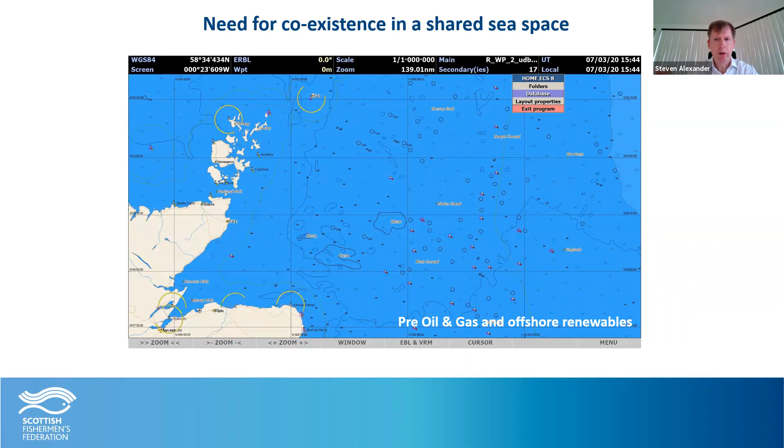Let's be honest, in an ideal world, all the different sectors of the sea would prefer to have the sea to themselves. But as we know, in the real world, it doesn't quite work like that. The following animation will hopefully highlight the need for coexistence in a shared sea space.

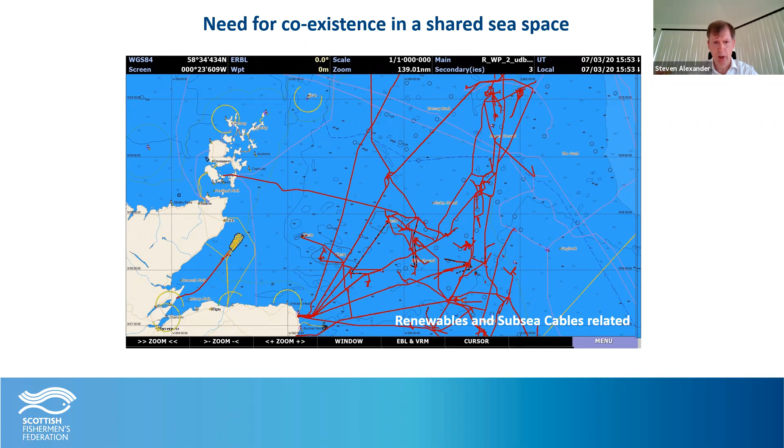So the first screen shows how fishermen would have seen that area pre-oil and gas and offshore renewables. We've superimposed the oil and gas information, then put on the renewables information, and if we now add on ScotWind leasing proposed future sites, and finally superimpose fishing data belonging to three fishing families, I think we'll get the point across that we have a very busy area.

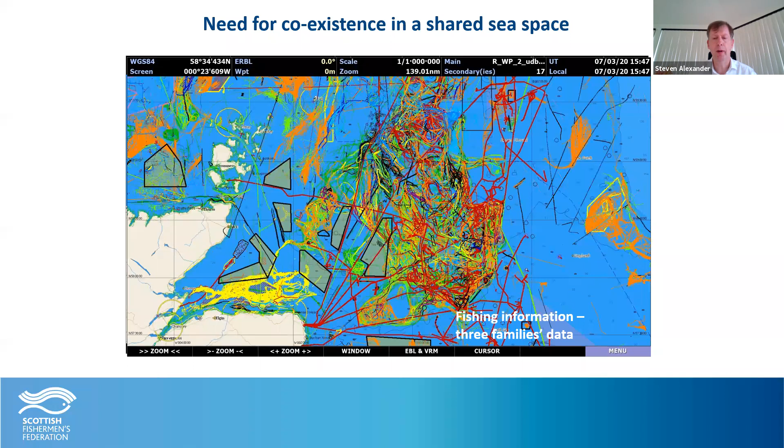Rather than being standoffish and chasing loss of access payments, in 1986 the SFF formed SFF Services Limited, set up to provide diversified work opportunities for member vessels, ideally engaging fishing vessels who face having their normal fishing patterns disrupted or end up being temporarily displaced by offshore installation or decommissioning activities. We believe this approach has played a major contribution to minimizing conflict by helping establish and nurture an excellent long-term working relationship between the Scottish fishing industry and the offshore energy sector, working with and not against energy industries.

It's certainly not a normal business model that we have developed, but we have done our best to stick to the ethos of using local boats wherever possible. Since the start of the millennium, over 550 different fishing vessels have undertaken offshore-related work through SFF services, accounting for over 105,000 vessel days at sea. A special mention must go to the oil and gas industry for recognising the uniqueness of the SFF vessel provision model. As highlighted earlier, similar relationships are being developed with other offshore industries such as renewables and subsea cables.

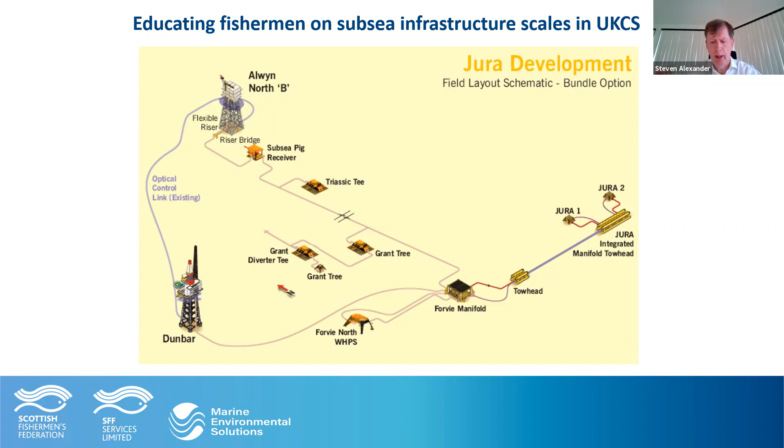The current slide provides an overview of how a new piece of kit, shown in the bottom right-hand corner, fits into an existing field. And the next slide shows how that manifold looks like in real life.

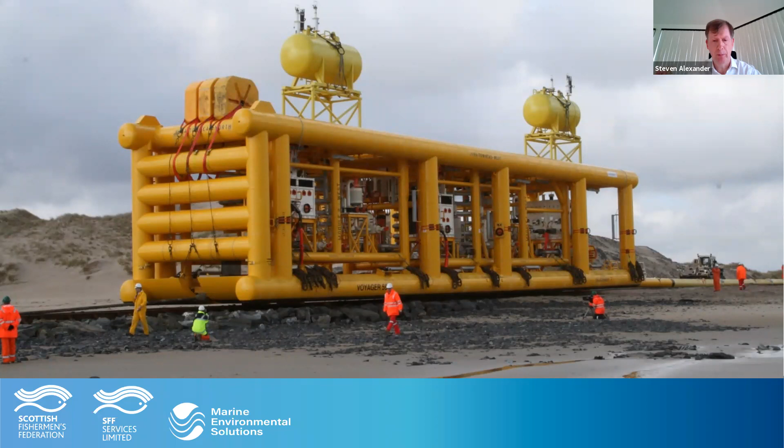I'm pleased to report that, by and large, the fishing industry's current relationship, developed over a number of years with the oil industry, is one of mutual respect, mutual understanding, and willingness to engage. This is what we are working to develop and hopefully replicate with the offshore renewables sector.

Maintaining the relationship during the decommissioning phase. This is a phase we are entering with the oil and gas industry, but certainly something to bear in mind in respect of offshore renewables. How strong is the relationship? It is easy to have a good relationship during the periods of good times with high oil prices, but how does the relationship hold up during the decommissioning phase, when it is more or less all money going outwards for the oil operator or wind farm developer? Ideally, at the point of project conception, there should be a clear picture of the full life cycle of the development, with plans in place to return the seabed back to its pre-development condition at the end of field life, to allow fishermen to safely return to fishing the locality.

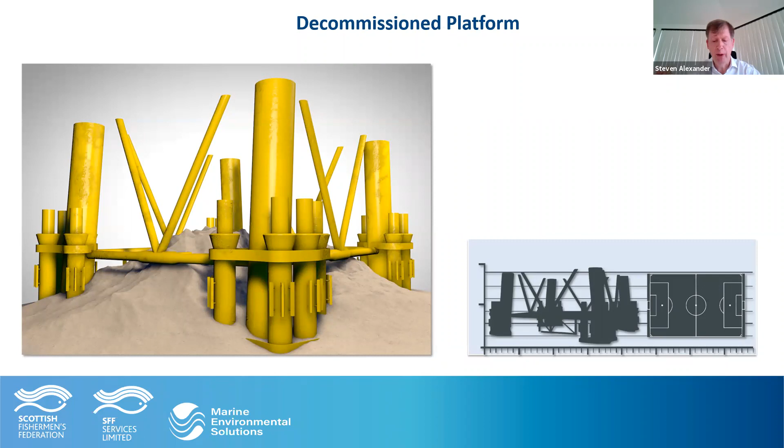Unfortunately, however, as we are finding out with oil and gas, this is not always possible. To conclude, the fishing industry's expectations in working with the offshore energy sector are a safer working environment in perpetuity, limit loss of access, respect for previous commitments, acknowledge the problems, and a genuine attempt to find solutions.

And that's me, Kevin. Thanks.